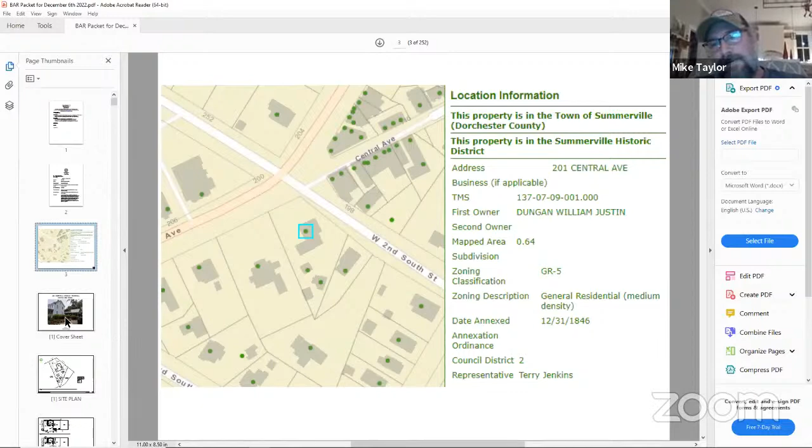Okay, yes, representing the Dungans for an addition to the right side of the house. There's an existing carport there, and they're wanting to turn this into living space. The floor plan will include a sitting area, a little mudroom that'll come off the front door, and a bedroom with a bath and a closet area.

The outside of the house is vinyl siding, and it's got a brick foundation around most of it with brick piers. So we've tried to incorporate the brick around the addition, and keeping with the house, we're trying to match the windows with the 2/2 windows. There is a door on the front that would be a fiberglass door that they want to paint. I think they're just going white with it.

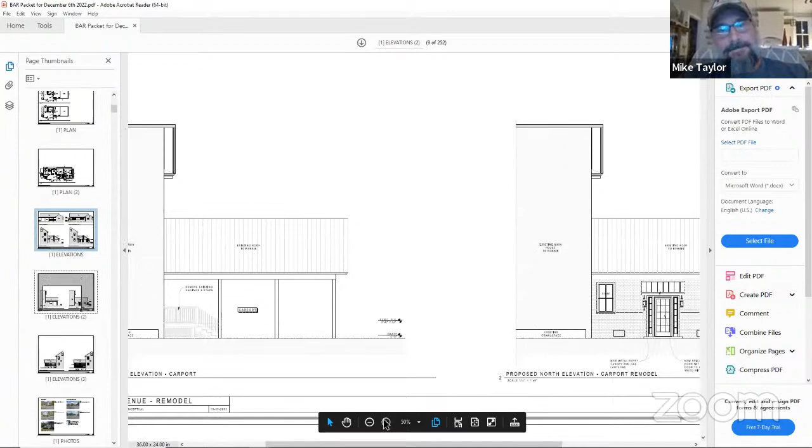Over on the left side of the house, they're also looking to add an open deck with an additional door on that side to access the deck. But the carport will remain with the roof, the gable end will remain, the eaves will be as they are. So really, we're infilling with the brick, the windows, and the doors.

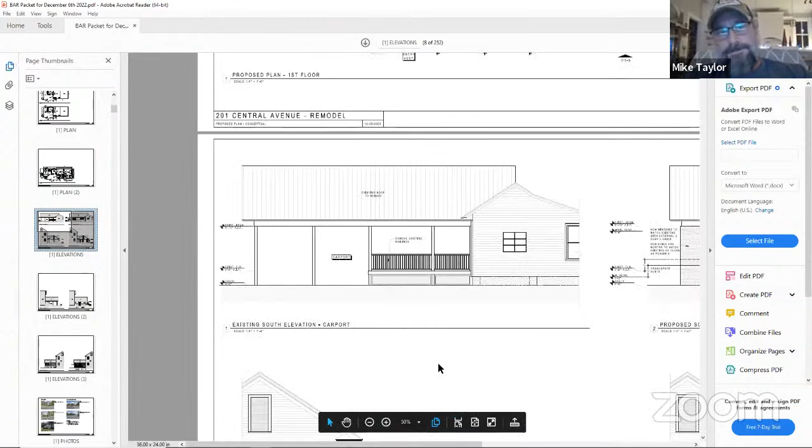Can I ask a question? I'm curious what happened about the tree. Does it need to be removed or not?

No, with this we would just enforce our tree protection requirements, which is a foot for every caliper inch of the tree. But no, it's not getting removed. Okay.

Any comments? Had this come before? Did we review this before? It was deferred because there was no one present at the meeting.

Becca, could you show me the plan, please? Which sheet? I wanted to see the previous and proposed plan, so they're laid out next to each other, existing on the left, proposed on the right.

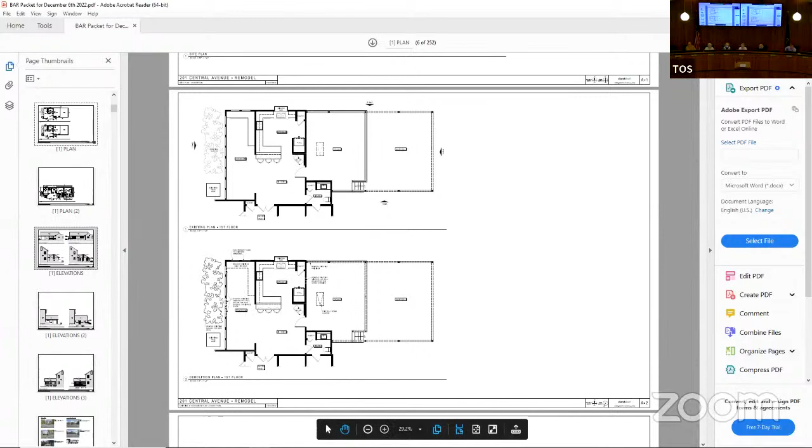Can you show me the plan, please? The floor plan? Yes. So this is the first floor with the demo plan, and this is the carport. I'll zoom in so you can see a little better. So there's existing, and then what is the proposed plan?

So are these all rental units? I believe, and Mike correct me if I'm wrong, the 3 cottages in the back are, and then the main house, which is the structure proposing renovations and the addition, well not technically an addition, is the main house where the primary homeowner lives. Yeah, so that's correct. The main house, where the work we're proposing to be done, that is their primary residence, right?

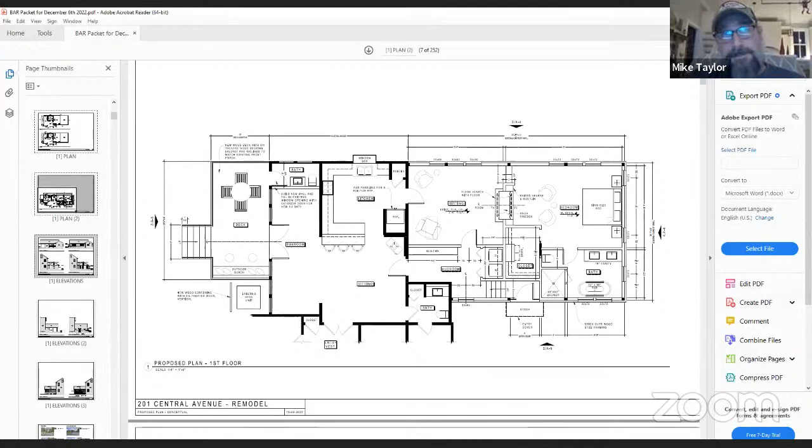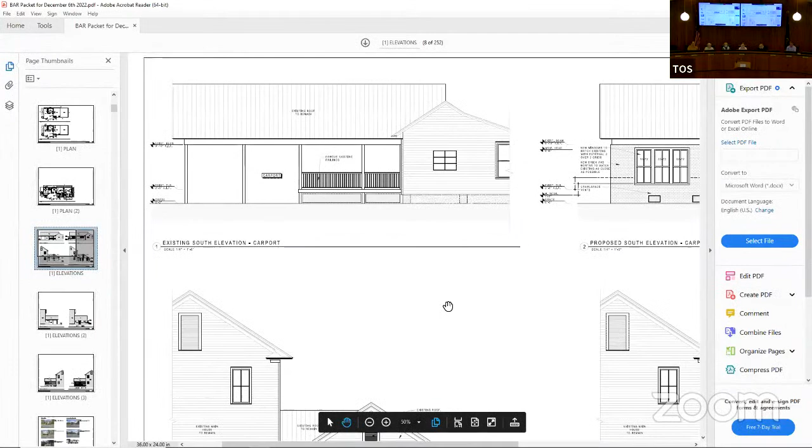And I think I saw someplace that the windows had a grid pattern. Are the windows currently in the house divided lights or simulated divided lights? Yeah, you've got on the back of the house, which I think was a sunroom that may have been added years ago, just a 1/1 type window. The main house is the 2/2 wood windows, which appear to be original.

It's a single pane of glass with the divided light. So on the carport side, to keep with the house, we were going to do the 2/2 with the external grid, which would match the house very closely. So when you say external grid, you're talking about a simulated divided light? Yes. Okay.

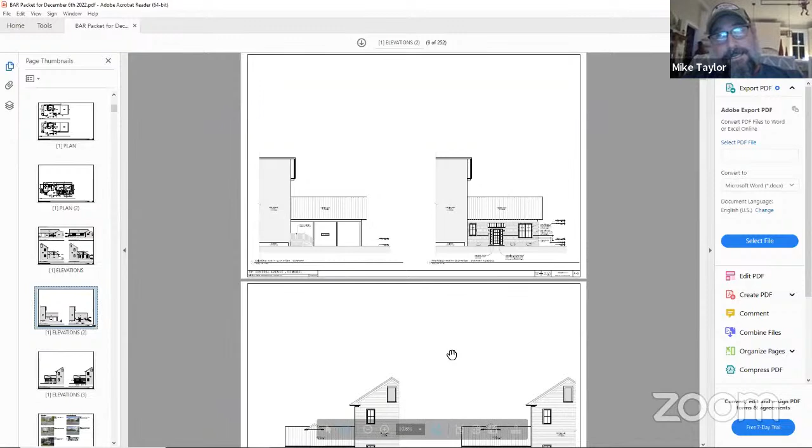And then you can see what they've chosen for the grid pattern on the door, on the right-hand side, on the carport side. Also external grids, and they've got some side lights on there as well with a transom. So that front door unit would be all together with the grids on the outside.

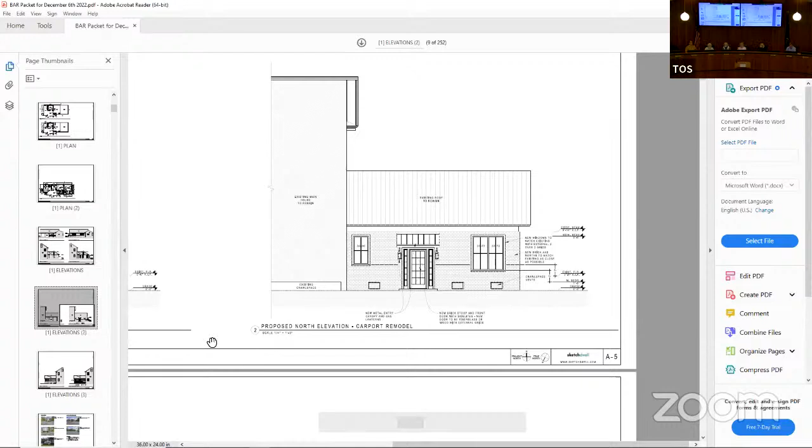I'm finding the drawings hard to read, and combining that, Mike, with the comments that you made, is this all going to be brick infill, or is it having siding with a brick base? I'm not sure and I can't tell from the drawings what you're doing.

Yeah, the outside of the entire carport enclosure area will be all brick. We've got a brick that's going to match that foundation very, very closely. And then the mortar, of course, we would try to match that as close as we could as well.

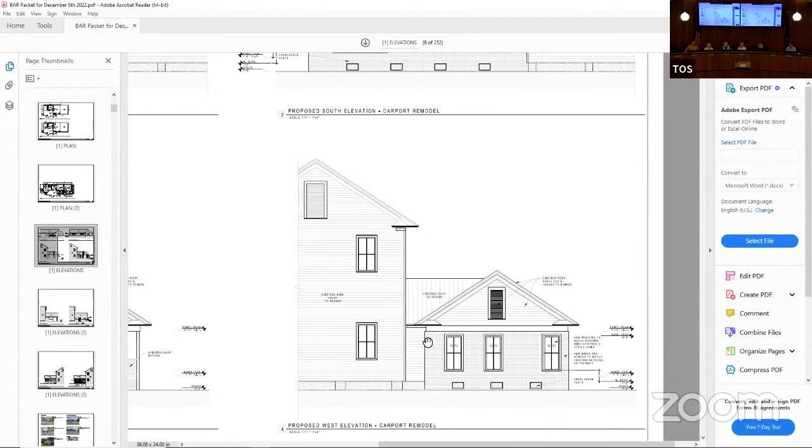So really, and gable up, is that why there's that little thing at the top where the brick goes up and then there's an inset? Not exactly sure what you're referring to, but there's an existing band board at the very top, Louvers. And we're going to brick up to that band board, which is the header basically around the carport. Right. So basically like a big frieze board up there that's existing, that is wrapping the existing headers.

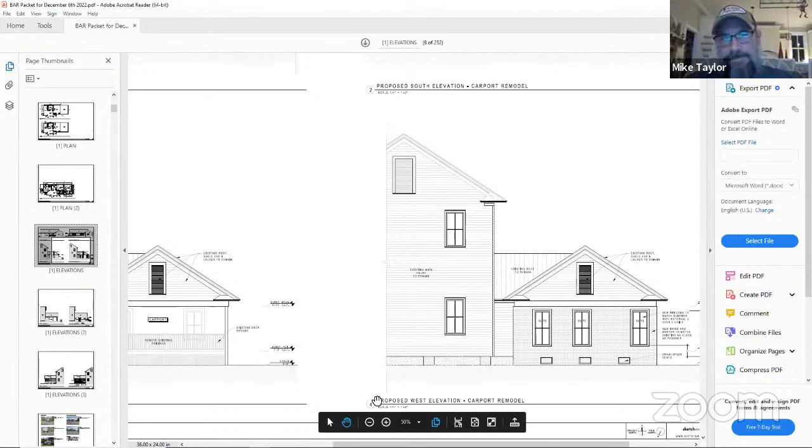The gable end that you see there, that's all existing with the siding and the metal roof, all existing. You can see at the front stoop we are adding a little covered area. We would match the standing seam roof with metal to match as close as we can, which is basically a silver, a Galvalume.

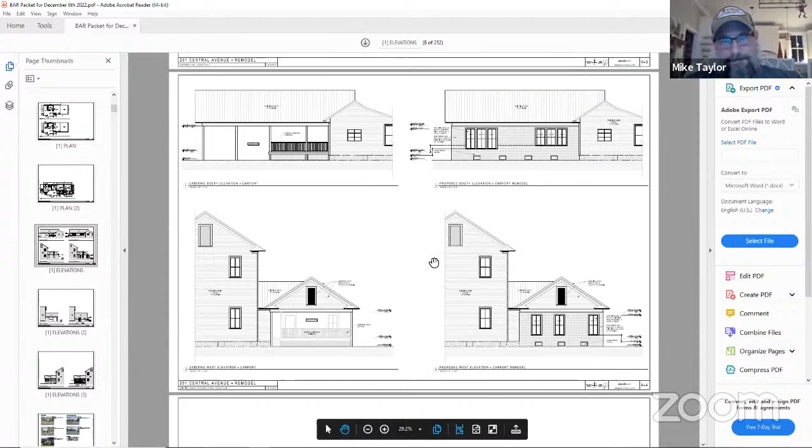Wouldn't it be appropriate architecturally for that band board to stand out over the brick rather than being recessed? It looks odd recessed. My thoughts on just hearing that it's all brick is that it's, to me, an odd detail that the brick goes up and then stops and that you recess it for that band board. And that equally, there aren't any of the details that might have been appropriate for like window trim. And I am also not 100% sure if this is the right choice, given the kind of colonial house that you've got, to add like to enclose this in this wrapped brick that is just clearly wrapped.

Does anyone else have any thoughts or comments on that, on the board? Rachel, I do. I thought that... what is the material underneath the vinyl on the main house? Or I guess this is the main house. What's under the vinyl?

Don't you have to use clapboard? They're enclosing something and creating a deck. I don't think we have anything in our guidelines that could force them to use a specific material on the existing house. It's beautiful, I love it, but I think it detracts from the main house. It would be hard for me to know which door to go in, which is the main door. One has gas lanterns on the outside and one doesn't. I just don't think it's a good match.

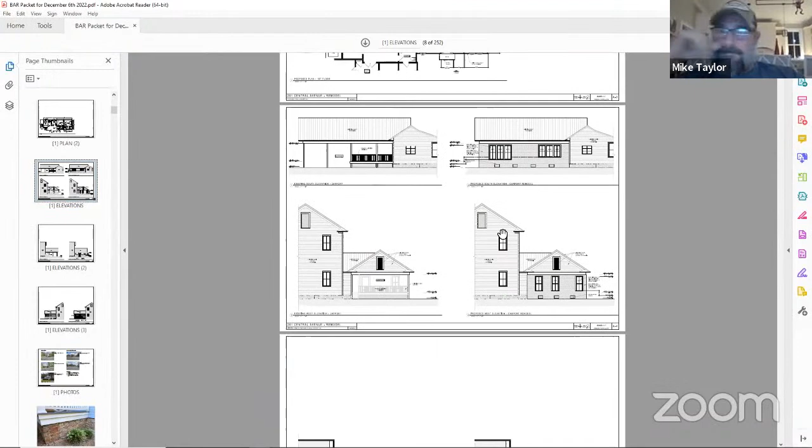When you say the windows are random, not really. The windows are laid out so that they work with the interior of the house. I thought we did a pretty good job of putting them in locations and staggering them so they weren't up and down and up and down.

You've got one bay of windows at a certain height because the bedroom area will drop down so we can get our egress windows in the bedroom. So you do have a different height window between the bedroom and the sitting areas - that's the difference in window heights.

What I'm referring to is the front, not the rear elevation - that doesn't matter to me very much. But on the front elevation that the public's going to see, you've got a double window on one side, and there's no other double windows on the front. The other one is a single window, not proportioned in the middle - it's kind of tucked over there on the side.

The front entrance door doesn't seem to be in keeping with the historic nature of the two-story house. This is becoming an addition to a historic house in our town, and it needs to look appropriate to the building it's tying into. Right now it just feels stuck over there - exactly what it is, a carport being filled in as inexpensively as possible.

Certainly we're not detailing that - the header is odd and unusual for it to project out past. There are just a lot of oddities here that I don't think enhance the architecture of the town in the historic district. I'd follow up exactly on what Tim's saying - on the end elevation you have one window which is in the middle but not centered under the opening above. It's so close to being centered but not quite, that it just feels haphazard.

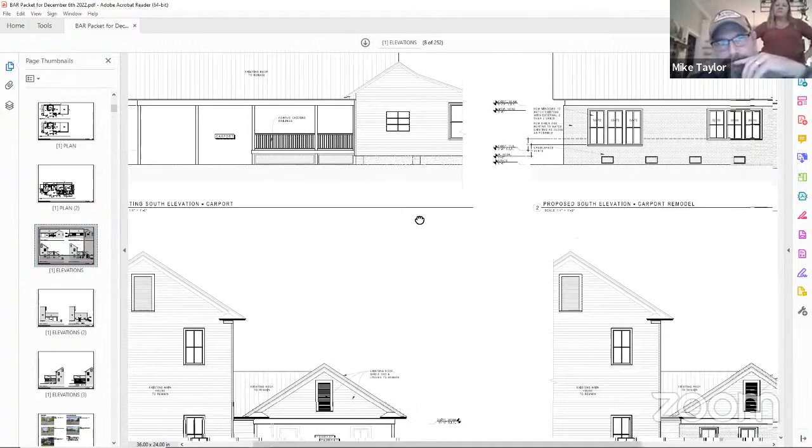It's not balanced. You're referring to, once again, the front elevation - the double window on the right and the single window on the left, right? They're completely not in keeping with the existing house.

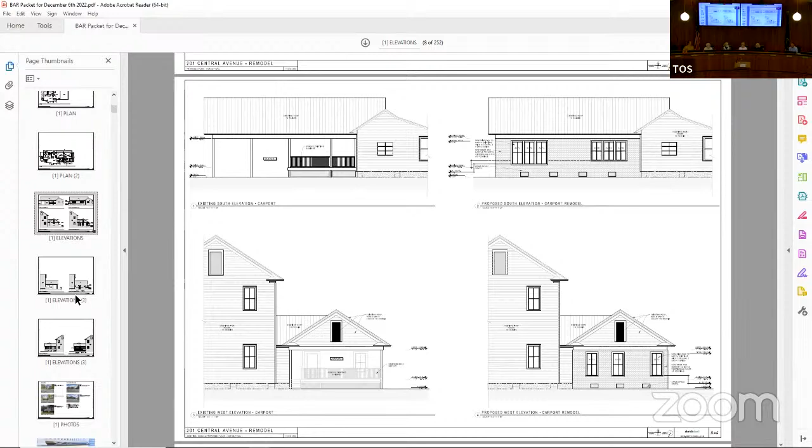Look at the existing house and the symmetry - how the windows are all proportionally placed equally, the same up and down. Then look at the addition you're proposing and how they're just randomly placed, in conjunction with the interior, not with the exterior aesthetics. At least the windows that face the street and can be seen from the street need to be proportional to the house.

All right, well that'll probably mean doing something with the floor plan as well to make that happen. And as far as the outside, obviously brick is not what you're liking, so I think there's only one other option, and that's board and batten. We drew it out and, well, we're going to do whatever y'all want us to do ultimately. So I think what you're saying is you want the outside to be board and batten, and then straighten out the windows as best we can.

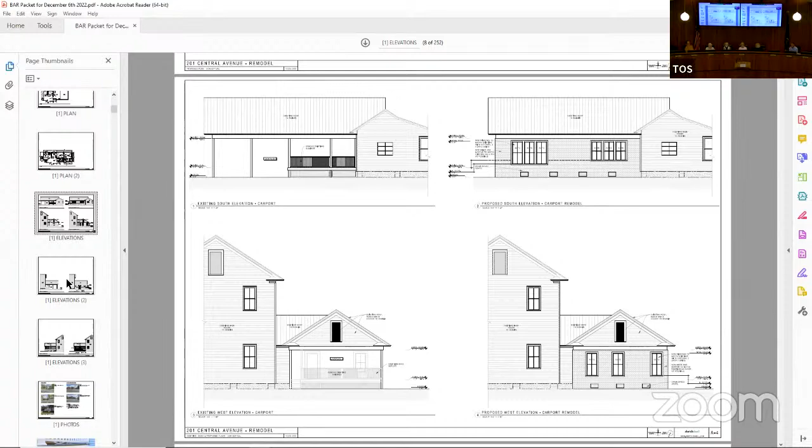It's part of what we're not getting across - the windows don't balance. There's a wide one, the door is not in the middle, there's a narrow one on the other side. Is there a way you can balance those to make them similar instead of having them just plopped up? I think one of the issues in making this look right is dealing with the fact that the addition is on grade.

It's on grade, right? And you cannot make that front match up with the front door - it's never going to look right because it's at grade and it shouldn't be at grade. It should be elevated, just like the house is elevated. And then you've got these windows where one side's shorter, one side's longer. So there's a lot of challenges there, Mike.

This might take a good architect to figure out a good solution to tie this all together somehow. Well, sure. So it sounds like in order to make the windows work, we're going to need to try to manipulate the floor plan. I don't know exactly how we'll do that, but certainly we can look at trying to do something different with the windows.

And then with the front door, I mean, you're talking about the front door being on grade. But Mike, in the front this is all one house, right? So the front door is on the porch. This isn't the front door, right? Correct. And so maybe the door needs to be on the side of the house or on the back of the house instead of the front where the public sees it, because there's already a front door.

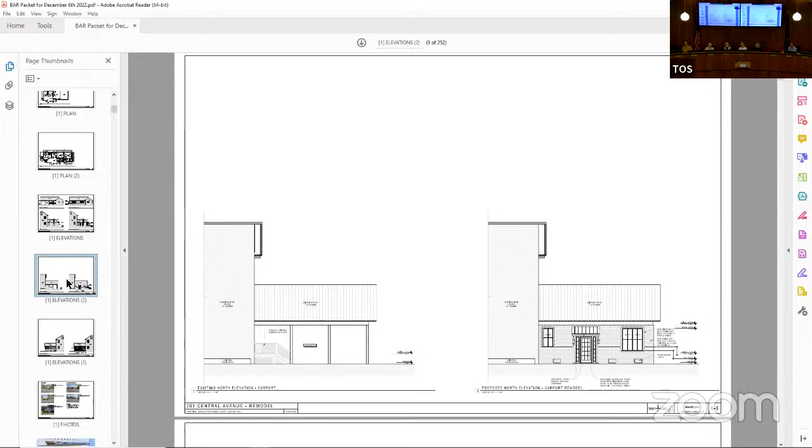I'm not sure what's going on in the house. It seems like it's another apartment, but I don't know. That's not our purview though, just the outside.

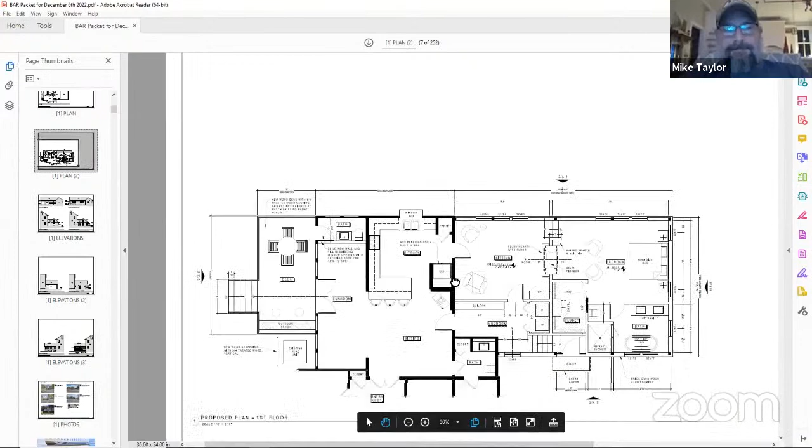No, it's definitely a master bedroom suite, bathroom, closet. And there's a sitting room that'll be off the kitchen, with a gas fireplace off of that sitting room. Is that extension the only kitchen in the house, or is there another kitchen in the main house? There's one kitchen - that's the main kitchen right there. So the sitting room will be right off of that.

All right, what's the height of the posts holding that section up? They're around 10 feet.

So Mike, there's a potential to go in there and put an elevated floor on the inside to get the appearance of that not being on grade, and then building a stoop outside for the porch to step up on. There are lots of good examples around town where that's happened, where somebody's got a front door and a side door, but it's all stepped up appropriately.

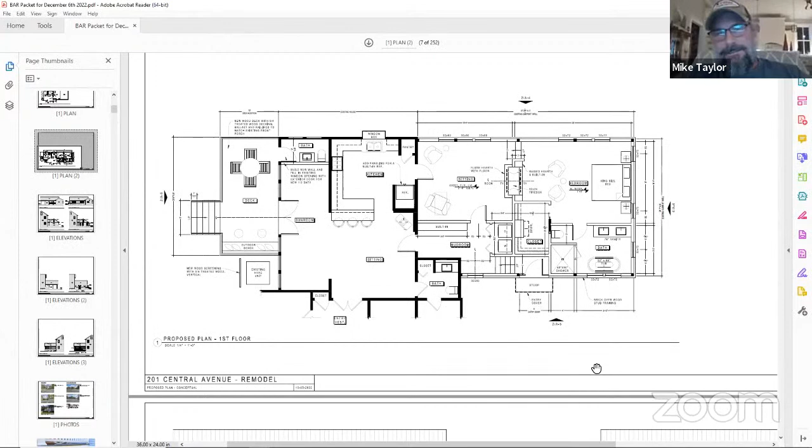Sure, if we raise that floor, we could raise the outside and then maybe run some stairs off to the right-hand side, not straight off the front, possibly.

But please consider whether that door is an appropriate element on the front. I don't think we can necessarily tell you categorically one way or the other what you need, because you'll need to try solutions that will make the infill feel more appropriate to this house. I don't know what the right answer is. All we know is that the door currently, as it is, is not appropriate on the street facing facade.

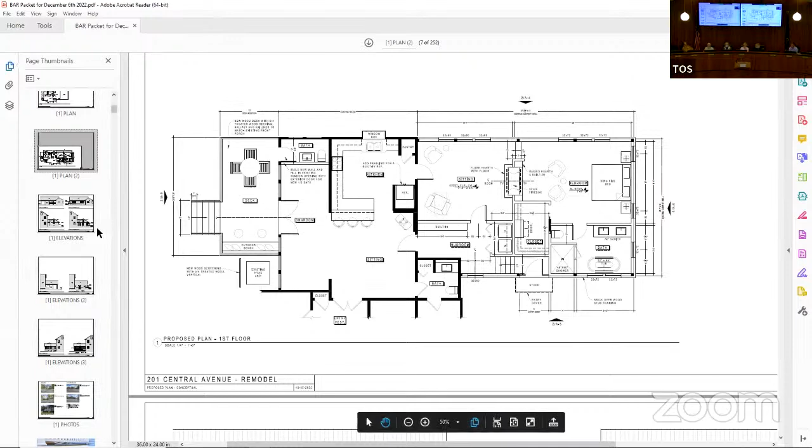And Mike, when you come back, if you could have whoever your drafts person is actually draft out the elevation so we can see the siding and the trim around the windows and everything, it'll help us really vision what you're trying to do there, and also help you build it correctly as well.

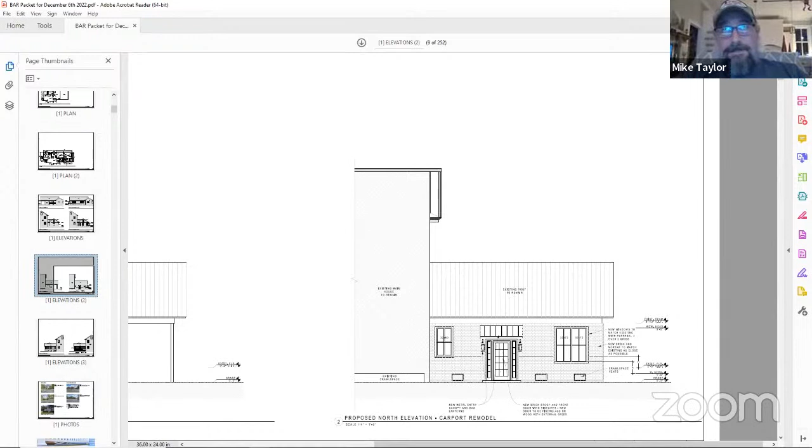Okay, so I guess one last takeaway. Certainly when I go into these meetings, I hope to walk out and start building, and we're going to be another 30 days from now. So I don't want to come back again and repeat. So I understand what we're talking about on the front door - we'll see if we can't raise that up, make that look right, or place it somewhere else. I don't know if putting it somewhere else is really an option, but if we keep it on the front, then we'll try to put it on a stoop with some stairs or something, if that's possible.

And then maybe we can change the floor plan around a little bit to get those windows lined up better to match the house. And it sounds like you guys would like to see a board and batten on the outside of that addition. I think what we're really saying is that brick won't work, and we're open to looking at alternatives of which board and batten could be an option, but we really need to see it to know if it will work.

Well, I don't know that there's any other option. We can't do lap siding right against lap siding that's vinyl, so I don't think lap siding is an option at all. If brick's not an option, then I think our only option is board and batten - unless you can get a lap siding in wood that has the same profile as the vinyl siding that's on there. Like I said, I think that vinyl is a small lap.

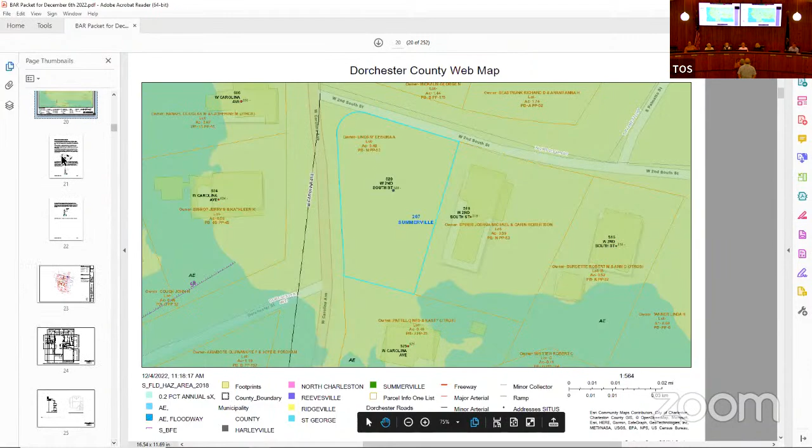Good evening, I'm Debbie Lindsay. This is Mr. Gene Brislin, our structural engineer. We appeared before you all in April of this year and received final approval, but we've made a few changes we wanted you to see and consider.

The changes that we've made are, we took the transoms off the front of the house, and we also removed a small window on the left elevation, right there where the garage doors are. There were three windows.

Mike, get on mute. I'll do it.

One was in the master closet, so we removed that one small window. And then there's also in your packet a discussion of the brick skirt we would like you to consider.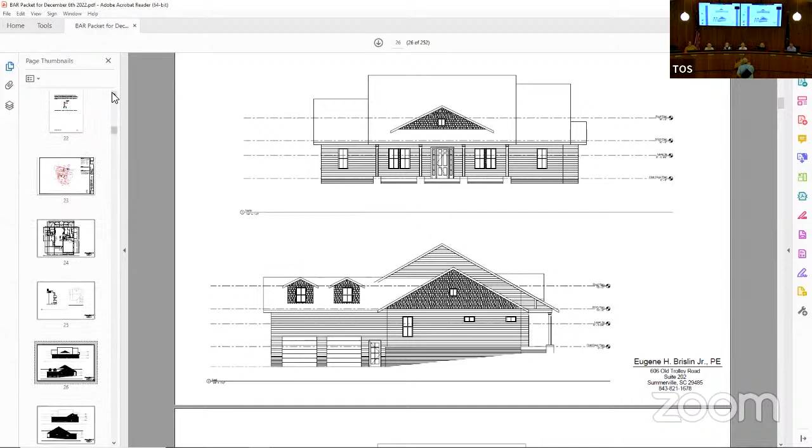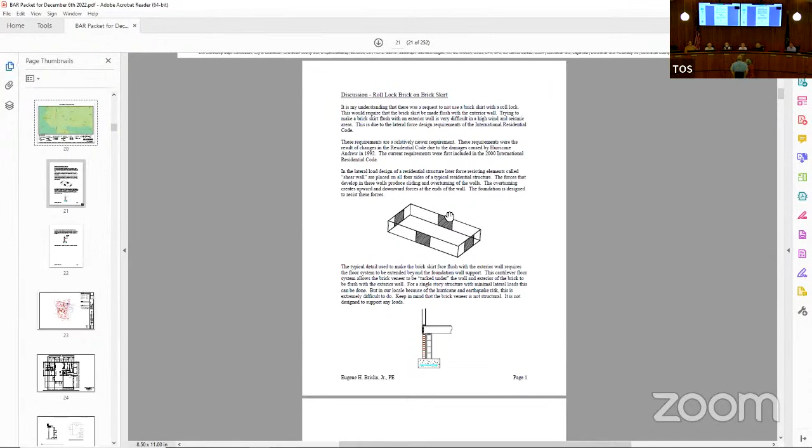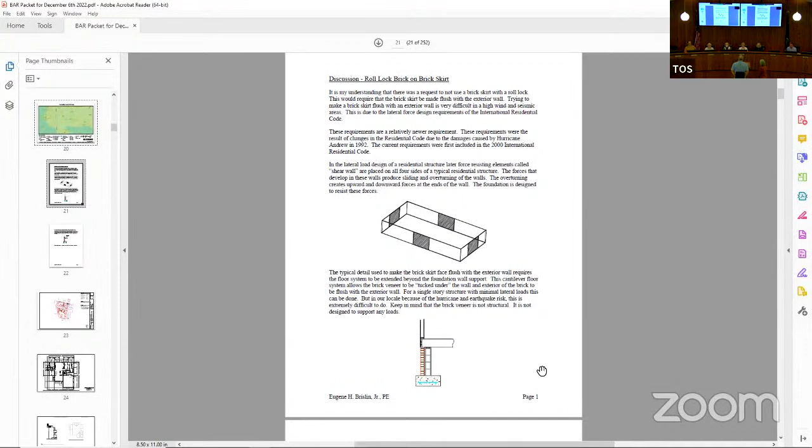Gene, if you want to go over that. John Dumas was the original architect and he did the drawings that you approved. His drawings are still there, all the trim and all the basics that he had on there we're still going to follow. I took those drawings and did a 3D model to give some massing idea, but mine didn't include all those details because John had done them. It gives you an idea of what the house is going to look like.

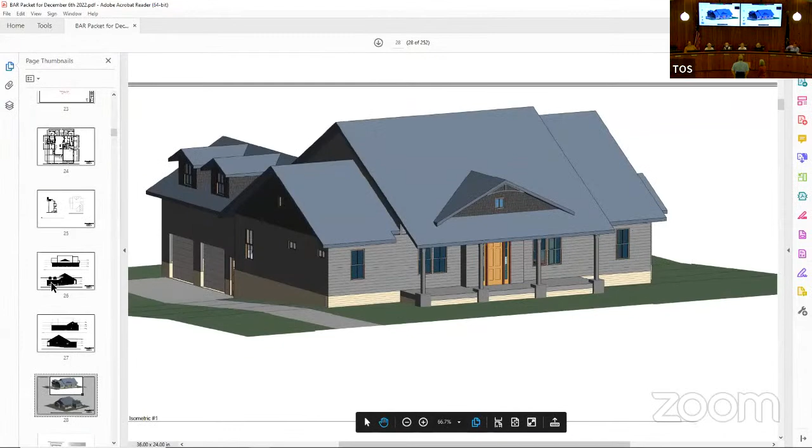As Doug said, the change we did was John had a very tall front door, about 9 feet, to match the transom windows. So we decided to keep the windows the same height and lighting as the transom, we just eliminated the transom itself. Now, we do keep them on the back elevation. They seemed to work well with the door because it's a normal size door, 7 foot I think, and she's got a 10 foot ceiling, so we checked it.

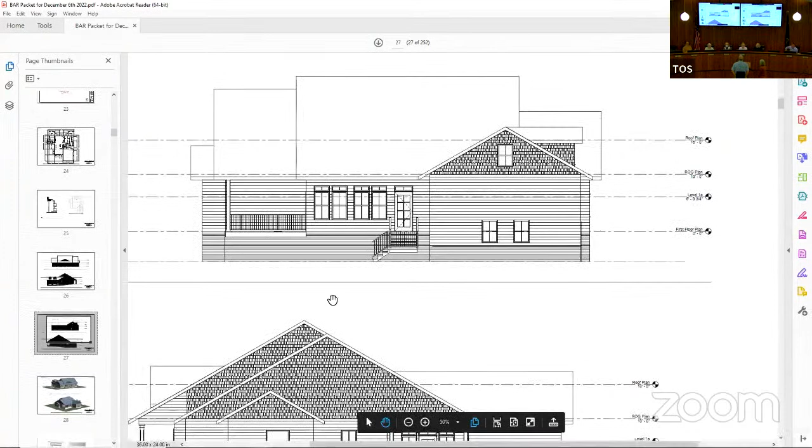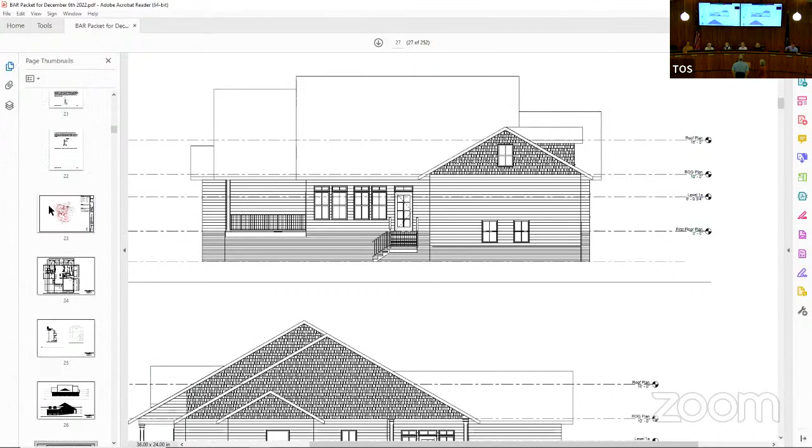I understand John had the original drawings, which I didn't see. I saw the revised drawings where he had tucked the brick underneath. The problem with that, from a structural perspective, is I've got to have shear walls on this thing, and I can't cantilever the floor system over and pick up the shear walls. There's nowhere on the perimeter I can do that and make it work. You can do it on porches, like the picture from the first project had a tucked-in brick skirt on a porch with shear walls and everything, but on the main house it's difficult.

You're talking about having the brick proud of the siding? Correct, which is probably the way we'd prefer it anyway. Oh okay, that's great. Don't we have a guideline that says it comes down to a course and then brick? We discussed that in a meeting, but it wasn't historically accurate. Not what I preferred.

Structurally though, I have a problem - the brick is not structural, it's veneer, so we don't use it for strength. CMU is a load carrying component. I've got a cantilever that's over 7 inches, and then the floor system has to take all of that overturning portion, that shear wall - it's very difficult to make that happen, if I can make it happen at all. Plus I have 2 connectors on either end of the wall to hold down, and there's no way I can get it bolted sideways over to get to the CMU.

So Rachel, I've got a question for you. I'm a contractor, but I'm not a home contractor, so we don't do this, but I know we've had lots of other applicants come before us who've requested this detail and done it. I know you kind of do some residential - how do you guys accomplish this?

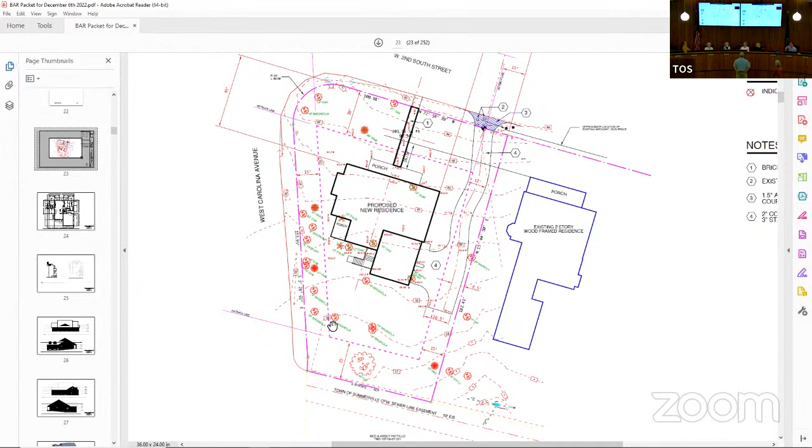But Gene, I want to clarify, that elevation was not actually what you want to do, was it? You've changed the windows, but won't the brick be out from the face of the house above? So the brick then insets? Yes, yes, it is. So the elevation as drawn is not what we're... it may not be, I will have to go back and look at it. No, that's correct, that is not.

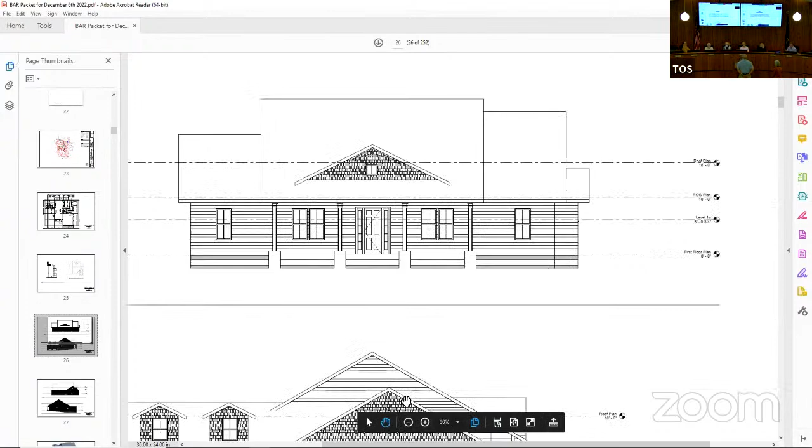There would be a bump out on the left, and the when you're saying you like that elevation, that's not what he wants. So on the left side and on the right side, there would be a little bump out, right, at the foundation. Oh, I see what you're saying. And then on the side where it gets even taller, you'll have a bigger- 3 inch, 3 and 5/8, or maybe 4 inch bump out on the left and right. That's correct. Yeah, it's just on one side. It's right around there.

An option we've used some other places is thin brick. They're actually brick adhered to the foundation wall and they get mortared in, so they have the appearance of real brick. They're only about a half inch thick or something like that. It's a feasible solution with a smaller trim band at the top, so that's an option we could do to keep the brick and satisfy the structural requirement. You can get those thin brick in almost any brick color or shape you've picked out. Are they not more subject to cracking? No, not really, because they're real brick material, so it's not a faux brick. It's just the brick face has been cut off and then you adhere it to the wall.

Quality. I haven't had an experience where I've had failure with that. We've used them, Tim, and they're really effective. I understand it feels like it should be flimsier, but honestly, when it's up, it's virtually impossible to tell that it's not a full-size brick. Especially if you're putting it on CMU, it will have that stability of the CMU behind it. It's a good solution.

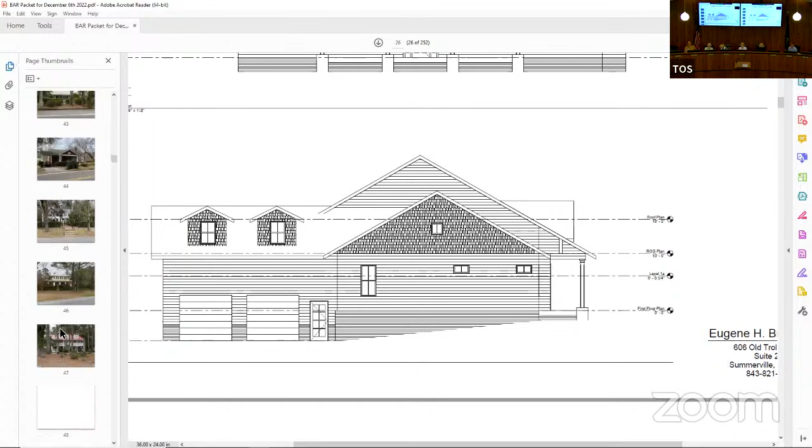All right, now we have another old business piece, 105 Hansberry Lane. I do have one letter to read for this one, so I'll just read it real quick, short. This is from Miss Mary Buchanan: I'm not in favor of vinyl on Hansberry Lane, we're in the historic district and guidelines should be followed and not set a precedent. Once the BAR gives approval, the plan should be followed. I have no problem with changing the front door as long as no vinyl is used. Thank you, Mary Buchanan.

So Heath, if you just want to explain what, yeah, we're gonna start with the doors. Okay, so originally with the door, basically I've taken out the side lighting, I guess, side transoms, side lights. So I apologize on that, but me and my wife, we've taken a look at it. It came time to order the door. And

we kind of have, the way our house is, we have a big vault that runs straight down the middle of the house, and we kind of actually want a little bit more privacy, so we really just don't care to have the side light there. It's the reason for us removing it. And yeah, so we left the transom up top. We still want to keep the same, like a wood stain finish on a fiberglass door. So everything about the door stays the same, we just removed the side lighting.

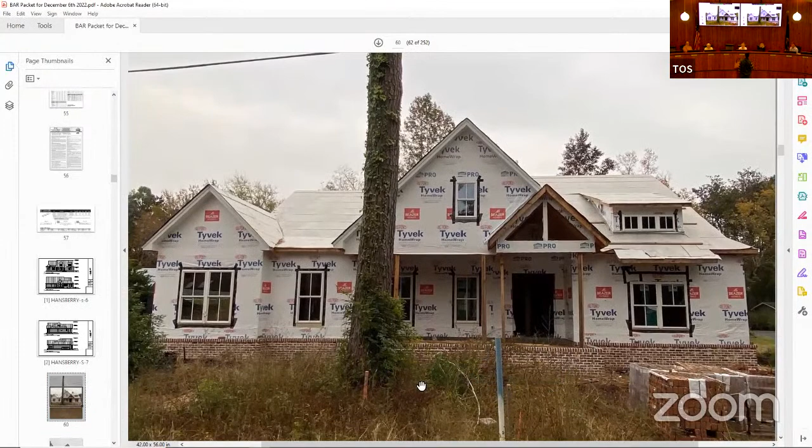Better picture here. And the siding on the house is Hardie plank, that's right? Correct, yes ma'am, and we approved the hardy plank. You did approve the hardy plank, that's correct. The issue I had is I didn't list vinyl for the soffits and aluminum for the fascia. I wasn't aware that I needed to be specific on listing the material for this area.

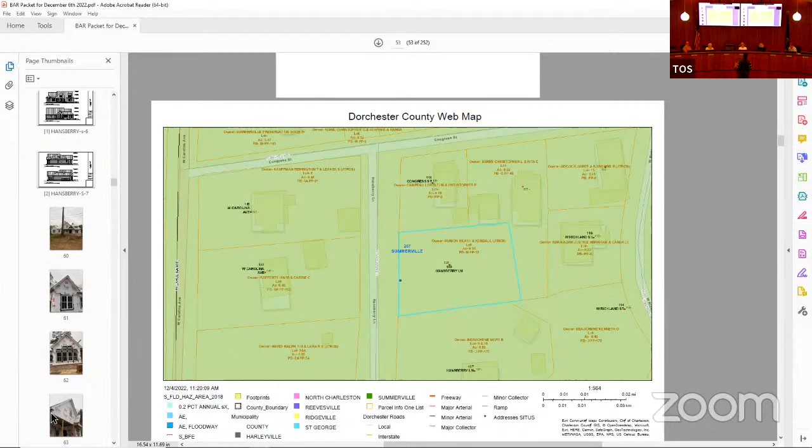And so my builder, the next door neighbor who is on the corner, I don't know if we have the property map, Mr. Campo, he has exactly what I'm doing. He has hardy plank siding and then aluminum fascia as well as vinyl soffits. If you drive throughout the historic district you could find it. A lot of my neighboring houses have it, except for Miss Buchanan who lives directly next door, hers is all wood, but there's aluminum fascia and vinyl soffits down in the historic district. So I wasn't trying to find a workaround, I just didn't see an issue with it until I was made aware.

And as you can see, we have started the work. And when Beck let me know, she did email me, we did stop.

There's certainly, as in the past, been a lot of vinyl. It's one of the things in the last 5 or 6 years we've tried to steer away from, significantly. I kind of feel like it's an important detail. And I'm willing to say okay, this is my personal opinion, on the door, but the soffits I feel like need to be hardy. I think it's this level of standard we've kind of adopted for the historic district.

Even though the neighboring properties don't follow those same guidelines, and I'm not trying to say I care what other people do on their property, that's their right between y'all and them. We can't undo the past. Just like the historic house with the blue vinyl siding we looked at earlier, we can't make them take it off, but we would never approve it going forward. So this is one of those cases where for new houses in the historic district, we just don't approve any kind of vinyl on them.

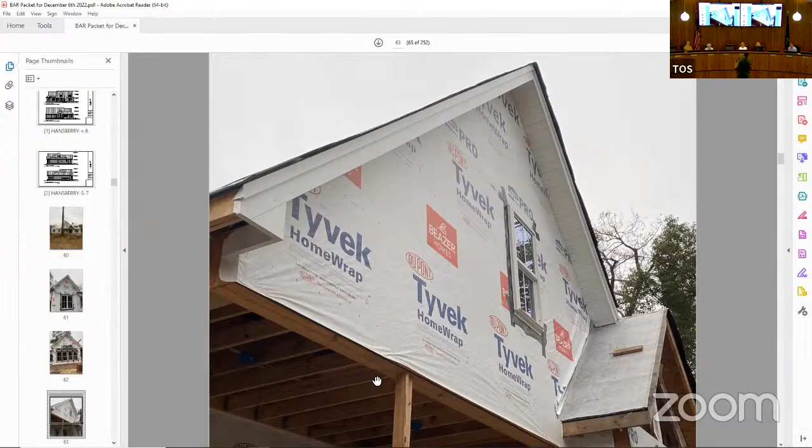Would you require him to take it off? So just so you're aware, if it does come down and we have to go the hardy plank route, I've been priced for it, it will cost an extra $4,400 to put hardy plank for the soffits and the fascia, including the paint.

Me and my builder just weren't aware of it, considering neighboring houses. There's actually a garage behind me on the corner, and the whole garage is completely vinyl.

I understand vinyl doesn't have the best reputation, and I don't want a vinyl house. That's why I'm going to put hardy plank around the house. As you can see, me and my wife are trying to put together a quality house. We've tried to take the right steps to do that.

We're not looking to take shortcuts either. We're putting a metal roof on the house, and for the brick, I had to go a little over budget to make sure I got a brick that I thought had a classic historic look. We're not looking to take shortcuts, but...

In this situation, yeah, I do apologize, I wasn't aware. Considering neighboring houses and other houses down in the historic district have exactly what I'm putting on my house. Specifically, the one right next door to me has exactly what I'll be doing.

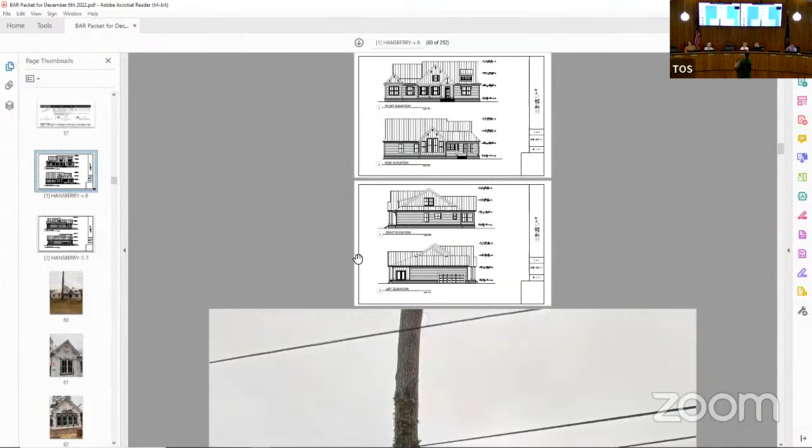Did she do the architectural building plans? Well, I don't think those were ever - she provided me information on what she thought was best. We basically came to agree. We were basically working together, she was like 'this is kind of what I think,' and she stepped in after I originally took it and designed it. These are the original elevations.

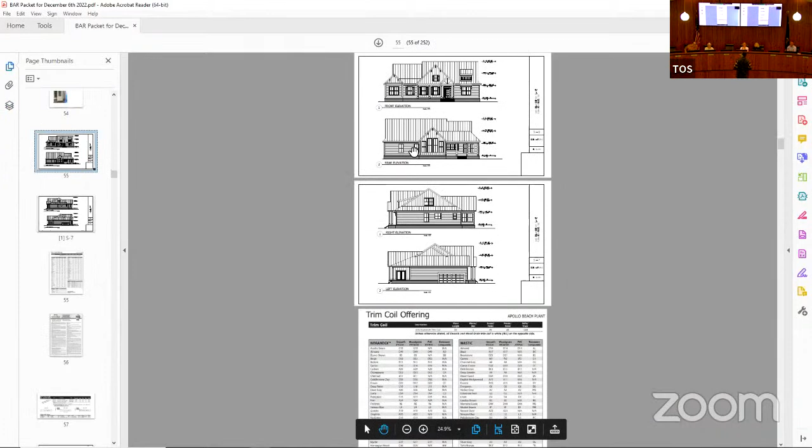Can you blow those up as best you can? Yeah.

So that detailing I see up there with the corbels and the brackets - how are you making those with vinyl? The portal will not be vinyl. You're talking about those brackets? Yes sir, those will not be vinyl. And then the frieze board, that's the board that runs up the rake of the gable - you're talking about the soffit of it? Is that going to be hardy?

So you have the fascia board, then the soffit, then the frieze board. You see the freeze board is the one right below it - it would be this board right here. So this is your fascia board, and this is what's called the frieze board sometimes. Is that going to be hardy? I think so - I don't... I understand, I apologize. No, that's okay, I understand, I can't give you a definite answer. Sure, I understand.

All right, David, looks like you get to decide.

We have a motion and a second. The motion was to approve, right? Approve as is. All right, I'm going to say yes. Yes. No. Yes.

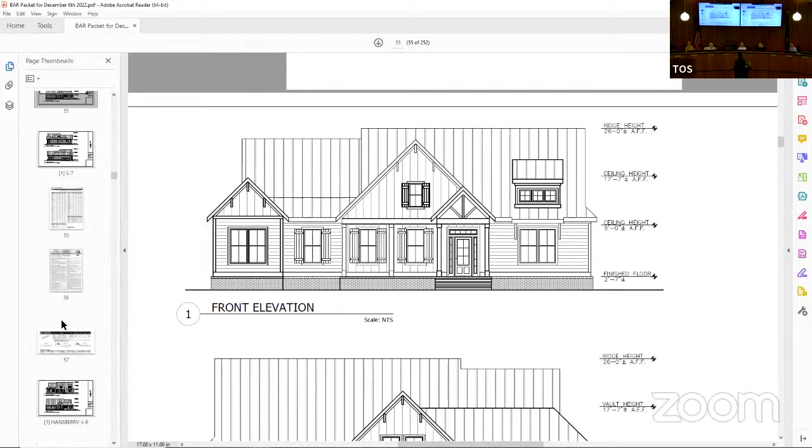Looking at your photographs, for us it's a privacy issue - I don't know if you've had a chance, some of you have walked through, but there's a huge vault that runs right through the middle of my house. Well, you've got a big glass door on there - yeah, that's correct. So the way you overcome the privacy issues with side glasses is you put sheer curtains up - you still get the light, but you don't have the visibility for peeping toms.

Yes sir, I mean it's just a preference - is there a rule that states going with one door over the other? There's no rule, it's just what's already been submitted and approved, yes sir.

The front door of a house is an important element, and it makes the front door and side lights enhance it. I've got side lights and an oval glass, and I've had to dash from there to my bedroom because you can see straight through my house. However, it looks great from both inside and outside.

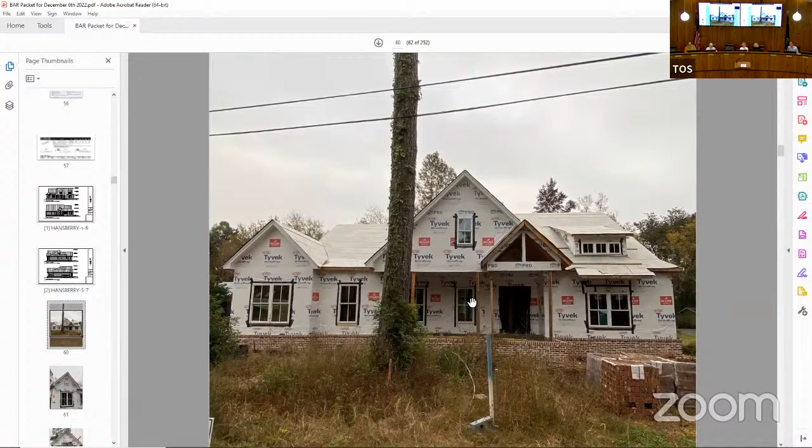All right, now we're actually in new business. Wow, 213 South Laurel. I'm scared now.

And Mr. Haskell, if you want me to show a specific image, just let me know.

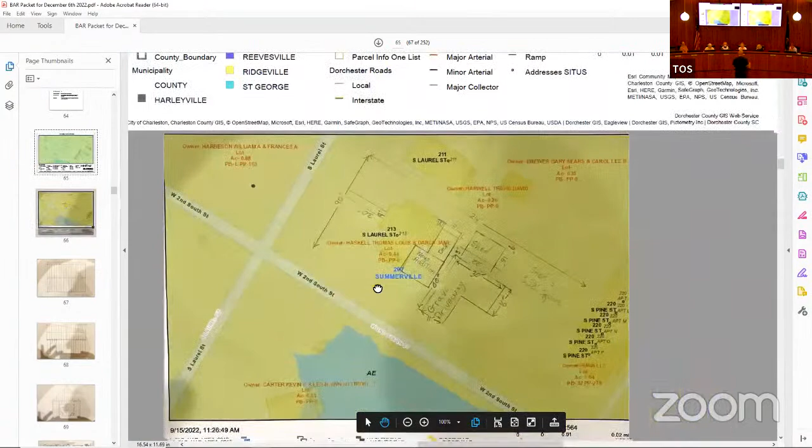Do you just want to explain the scope of work? Okay, I'm sorry. That's okay.

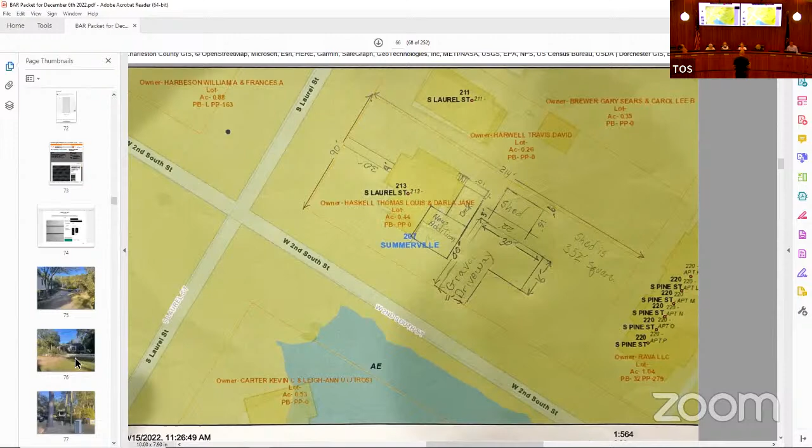What we want to do is put a shed in, back to the house behind the deck, along where you can see it's written on there. We have limited space in our home. One room is completely full of stuff, and underneath the house is full of stuff. We need to have some place to store these things. Right where you see the Honda and the old truck is the approximate location of where that shed is going to go. We're trying to build it so it matches aesthetically the same as the outside of the house.

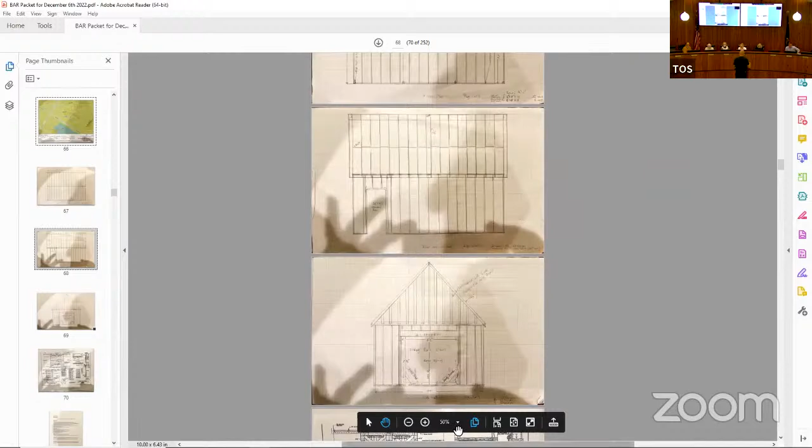We're going to use Hardie board siding, wood fascia, Hardie board. We don't intend on putting any windows in it right at this time. We are going to put a 36x8 door on the left side so we can walk in, and we want to put two doors on the end facing towards the house, barn door style, so we can get stuff in.

Are those barn doors on tracks or is that on hinges? They'll be on tracks, is the intention. Okay.

I have no doubt that you're going to do a good job with this because you've done a fantastic job with the house. But the drawings that you presented do not show the detail of the frieze board. There's a separate addition to this at the end that has all the explanations of how we plan on doing that, a specific drawing for this box right there.

The blank, I apologize, that kind of describes how it's going to be built, but not necessarily how it's going to be finished. Okay, like I said, next year it'll be Hardie board trim. The roof will be asphalt shingles to match. But the trim details are absent from the drawings, although I have no doubt you're going to do it right.

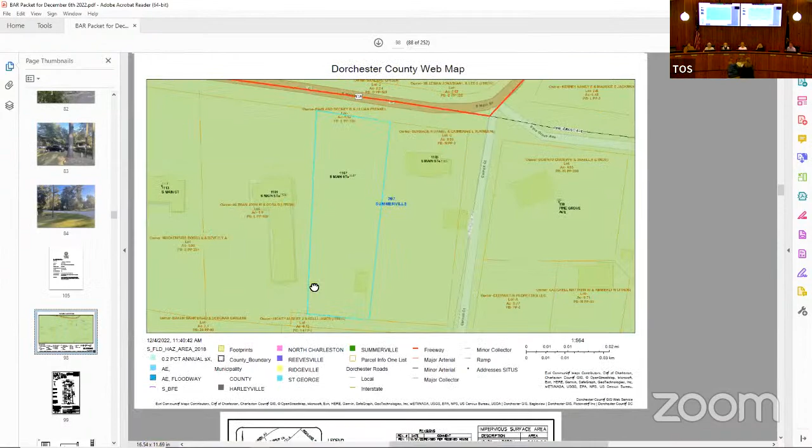Rodney, and this is Jillian. Our first time, so we're not sure.

Just tell me if you want me to jump to a specific view or page. Start out with, do we have a photo of the house? Of the new house you're building? We submitted one, I think, within the packet.

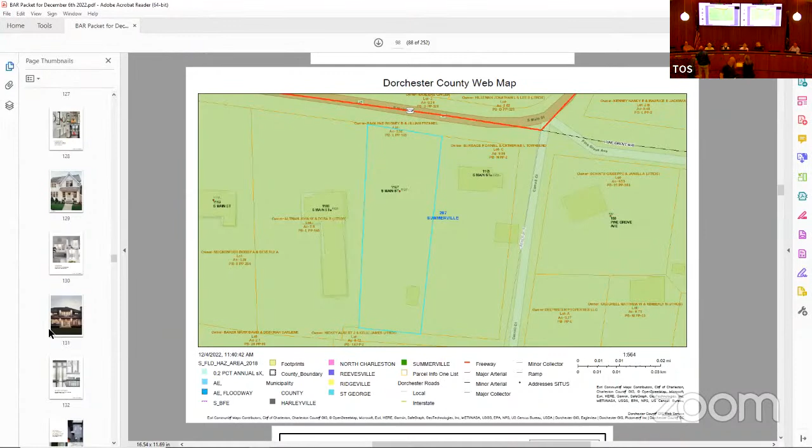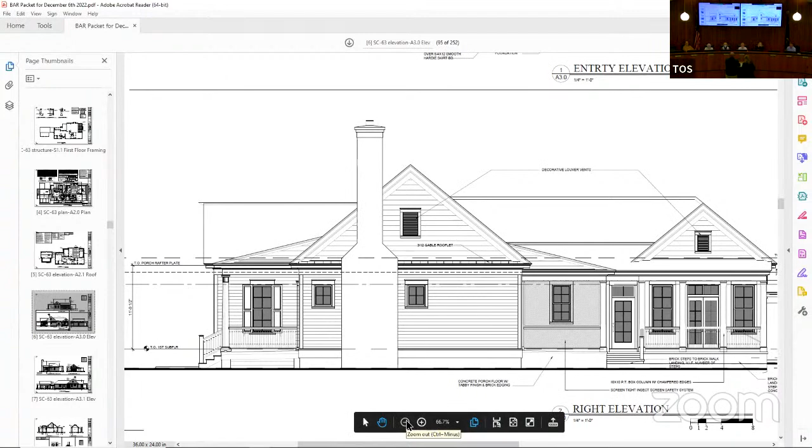Now, the only thing, I had the arborist come out after we submitted, and the detached garage, we're gonna have to move back. We have a lot of trees on the property. There's a 100-year-old hickory and a 100-year-old oak, so we want to obviously keep those. So what will happen is it'll still be a detached garage, but the breezeway will no longer be, and the garage will be moved back.

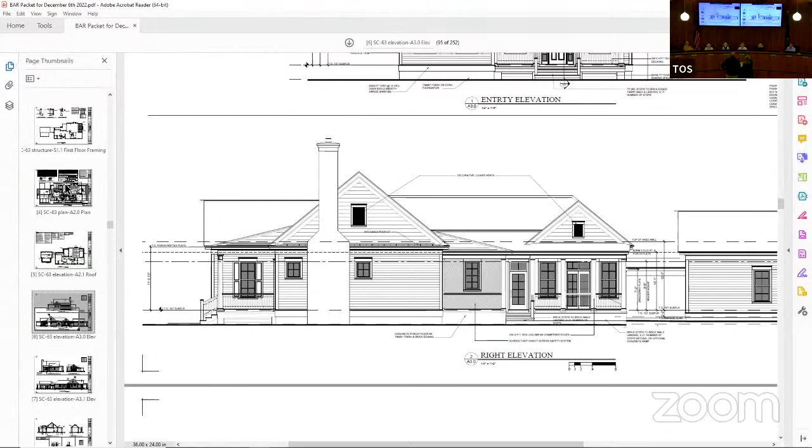It looks like it's moved away from the trees, like 75 feet back, going all the way back. Yeah, that's right, that's right.

Let's see, y'all have to go through some kind of a variance for the setback requirement there on the garage. No, we're within the setback. Detached accessory has different rules for setbacks. Okay, yeah, it's 10 feet.

Okay, good. Are we reviewing the garage today? The whole thing. Okay, so it's the same garage, just located back there. Gotcha, okay, thank you.

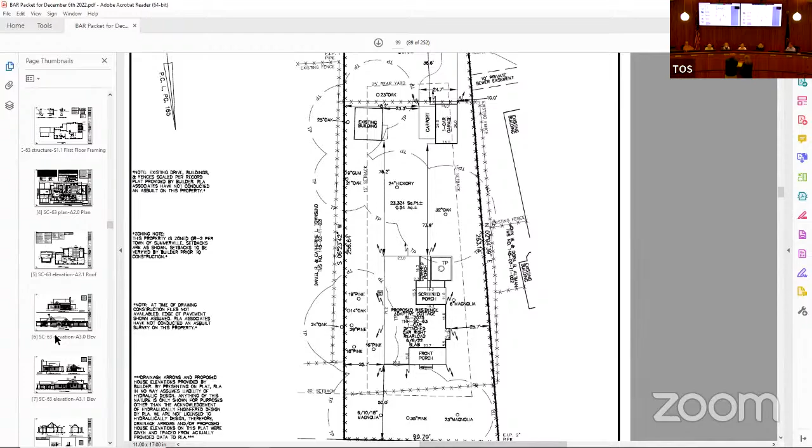They're wood clad windows with SDL grids and shadow bars. We won't have screens in front of the house. The front door is mahogany. The rear doors are also wood clad.

It's a great looking house. I wish you could see a photo of it. Yeah, I wish we did. I read the article about your home in Beaufort and saw the photos. It's a really beautiful home.

Thank you. And actually, on a whim, we decided to go down to Habersham and I said, we're gonna find this house. We had no idea where it was. So we went around and looked around Habersham for about an hour, and there was a lady walking her dog. We asked her, hey, have you heard about this adaptive cottage? And she said, oh, yeah, let me climb in and I'll take you right to it. So she climbed in the truck and took us to the house, and we boldly knocked on the door. The people living there gave us a tour of the house. Oh cool, so yeah, it was fantastic to see something that's already been built.

Well, it's also nice to see architectural drawings that are complete. As far as that, I'd especially like to compliment you on that, because it's so much easier for us to actually see all the architectural details, see the proportions, see what the foundations are, how it all works. It makes such a difference.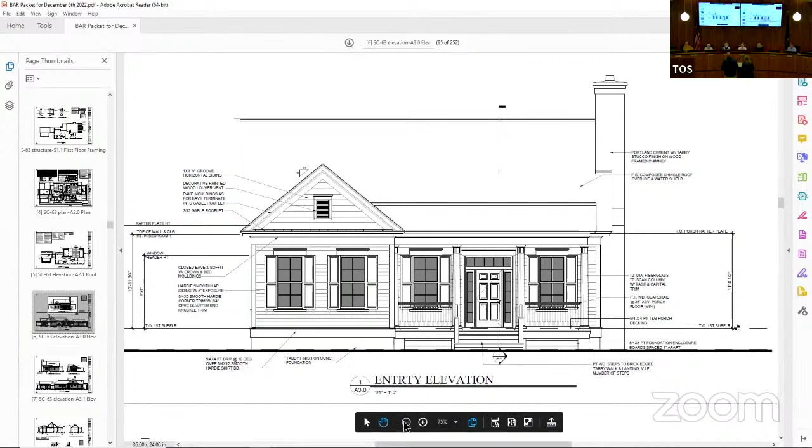It shows barn doors on the side, but since it's going to be so far back on the lot, I decided to close that in instead of just putting barn doors, for security. I don't know if that's something I need to address. Thank you for mentioning it. It's okay, suits me.

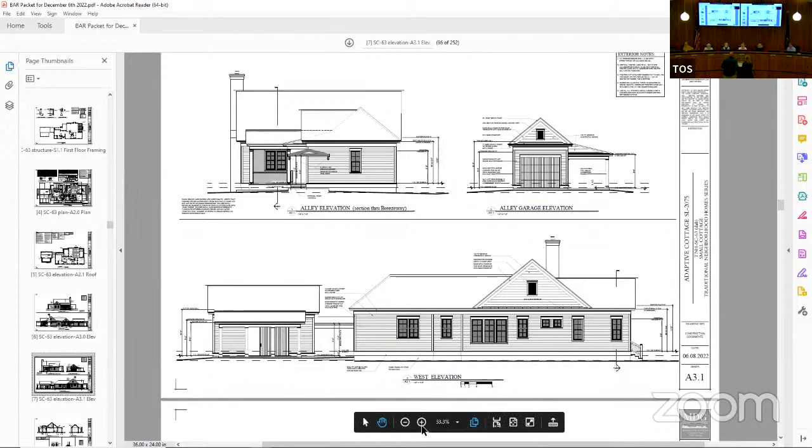One question back to the house: the distance from the ground to the first floor or porch is 24 inches. Is this going to be built on a crawl space? It'll be a raised slab, 24-inch raised slab, with tabby finish.

I'll make a motion we approve. See what happens when you come with decent plans. Awesome, that's the motion. Do I have a motion? I'll second it.

Jane: Yes, I approve. Beth: Yes, I approve. I loved all the attention to the details. Nancy Jean: Yes. And I: yes.

Good luck, guys, looking forward to seeing it. You have to give us a tour when you finish. Oh yeah, thank you so much. Okay, thank you, good luck. Thanks.

And the next one is 918 South Main.

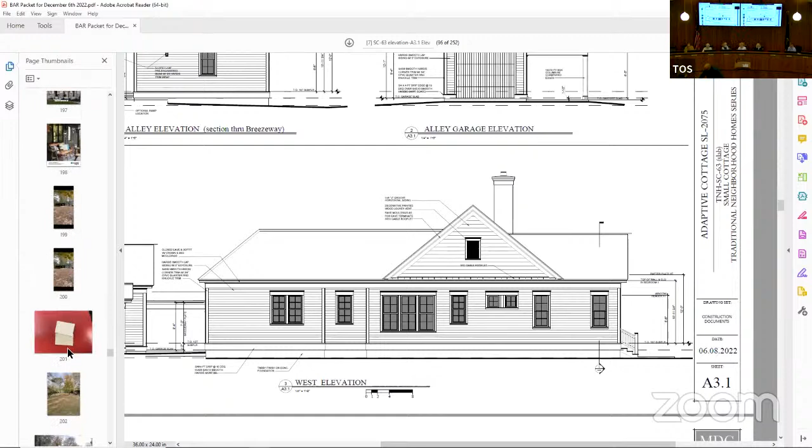I'm gonna ask you to raise the microphone a little. I'm a little old lady hard of hearing. There we go.

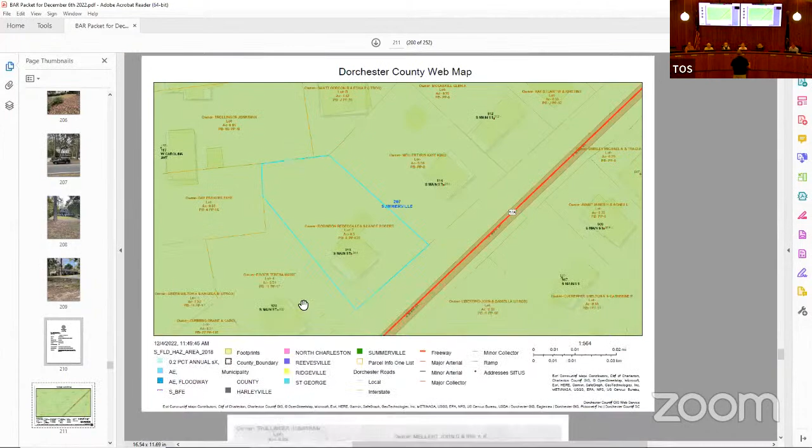So there's the main house, basically the screen porch is going directly on the back. There's already a small mud room that was attached to the house. So we're going to basically enlarge that and pull the back of the house out about 16 feet, keeping the same elevations of the soffit and the fascia.

It does have vinyl siding on the house. We're going to try to match that with an almond Dutch lap type siding.

There's a picture of the front of the house, and there's a picture of the rear existing. That one bump out on the left is the mud room that was added on; that's coming off and becoming new, if you will.

That only comes out about 10 feet and the new part will be 16 feet. Then to fill in that inset corner there will be a screened-in porch, with 6x6s on the corners, standard 2x2 pickets and handrails on the inside of the screen porch, with a vinyl screen door on the back.

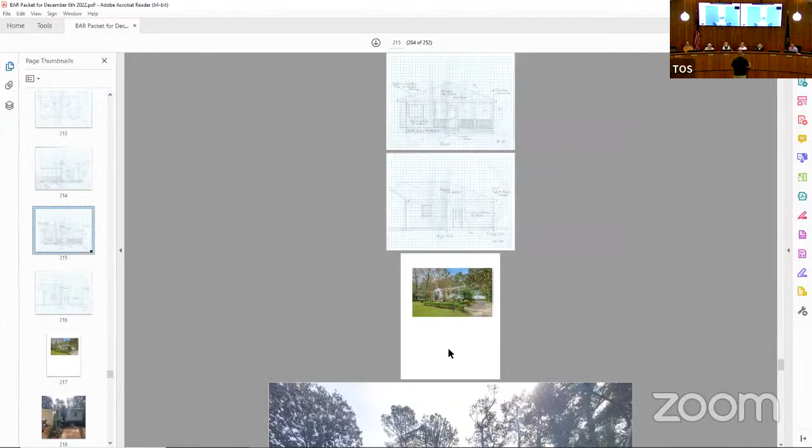And what were the new windows? One window that we're gonna propose to put on the back, and that would be either a double hung with, a vinyl double hung if possible, just because it's not seen, with the wide trim on the sides to match the rest of the house. And it says picture window there because that was sort of the first thought. That window would be approximately 48 inches wide, about the same in height.

How much siding are we adding? Are we adding it on three sides, or how many? Just basically that one part there, about 12 feet wide and about 16 feet, which currently is about 10 feet. So we're adding about 6 feet on, and to the one back picture there that showed - so not adding very much.

And to be honest with you, there's that whole right side where that tankless water heater is - all that is coming down, and we can more than likely use that so that it's the exact same siding.

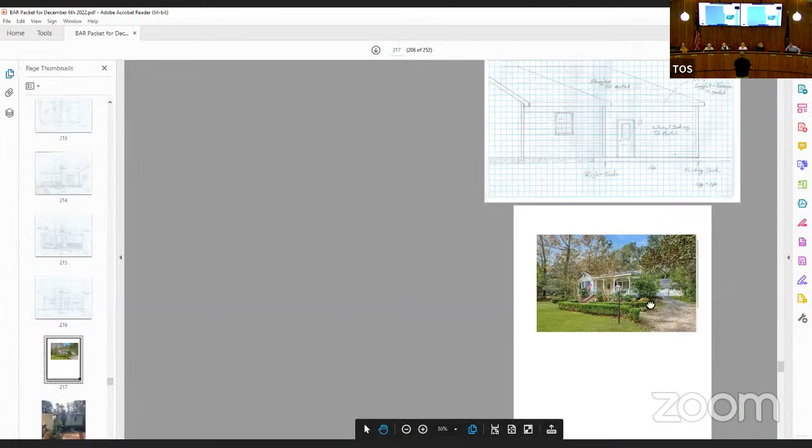Is this the house by 5 Points? Yeah, and there are like 2 or 3 cottages right there together. 920, yellow house, I believe—it's a cute house. So you walk back through, there's a doorway here and you walk back into where the porch area is.

I want to say we approved the garage many years ago. I think we approved the garage many years ago. That may have been a different project. The garage is vinyl siding as well.

For what we're going to have to remove, I can put back the original siding so that it matches completely on the exterior—for the vinyl, you mean? Yes. So almost like you never even knew it. Right.

But you're adding on, so you're going to have to have some new material on that inside wall, one side wall. Then you have the back and the other side wall, correct? So siding was being removed—right. Yeah, whatever you guys think is okay, it's the back of the house.

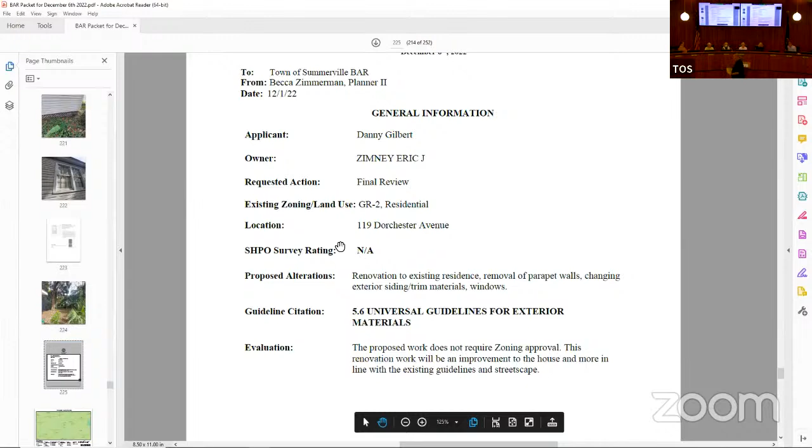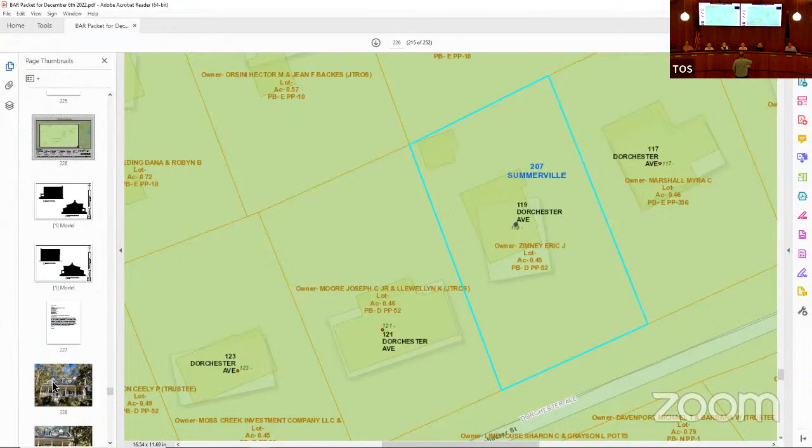And the final project is 119 Dorchester Avenue. My name is Danny Gilbert, I'm a general contractor. My client is Amy, in the back. We're a little different than everybody else because we're not asking for an add-on or to build something new—we're just trying to repair what we have. Amy lost her husband this past year, and she's found out that the whole stucco system on her house is failing.

It has parapets—you see on the roof there are parapet walls. All we're asking is to tear those parapets down, since they're rotten anyway, put in a 16-inch overhang, and then do the house up with stucco soffit, stucco fascia, stucco—sorry, Hardie, I mean Hardie 6-inch lap. The only place we would not do that is on the crawl space.

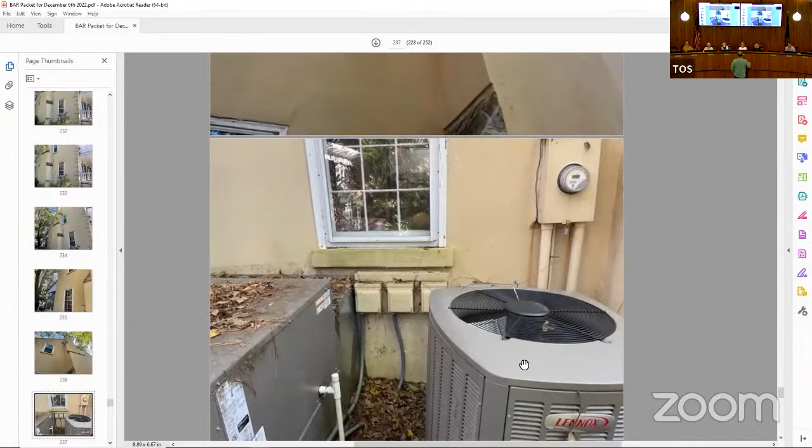Right now those are all foam behind those blocks. On the crawl space part, we're not really sure what's down there—either the concrete block is offset, or the face of the concrete block has like a 2-inch stucco foam. So outside of that, we want to take the parapets down and do Hardie on the house. Also, we would take out all the existing columns, since most of the ones on the porches are rotten, and use square columns like she has on this rear porch in the back. It was built in the 80s, mid-80s.

Yep, so not a very good time for a stucco house—a lot of lawsuits back then, and this one probably should have been included in a lawsuit. Aren't you doing something with the rear dormers as well? Yeah, so if you look at these 3 dormers right here, it did make a lot of sense—those are actually vinyl. It made a lot of sense to go back and put Hardie on all those sides and add the overhang.

So what we'd like to do is combine those into a shed, just one single shed roof off the back, give her a little bit extra space in the back for her closets, and make it a little bit easier for maintenance.

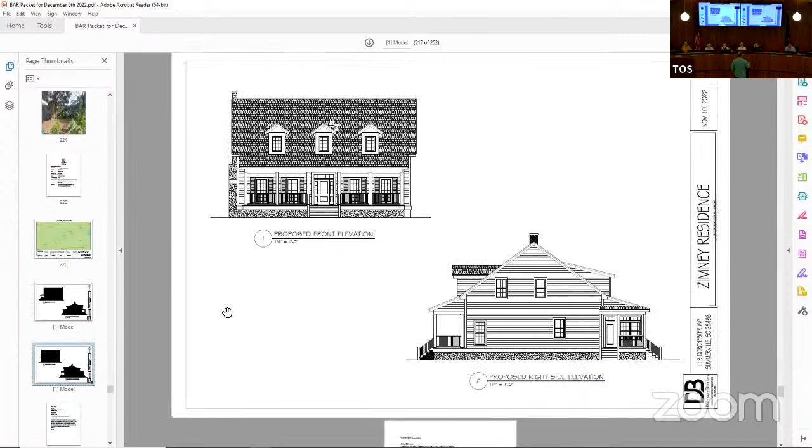Any window replacements here? The upstairs windows have been replaced, but the downstairs windows have not, and they're all wood, true divided light, and they're rotten. So we want to come back and do something with those. We'd like to match the ones on the second floor, but those are vinyl, so we're at your mercy on the windows. The front door would be the same - we would replace it with a like front door in wood. The side lights, the transom, all that would be the same.

Eventually we would want those to be simulated divided light or true divided light windows, regardless of wood or vinyl. We have vinyl on the second floor. I'm asking what would you require - would you require those to be wood, or wood clad, or would you want those to match the upper ones with vinyl?

We would maintain the same grid pattern, which I believe is like 6 over 6. In the past, we've approved vinyl windows as long as they have the simulated divided light. Sure, that's the main thing. No problem - so no snapping grids, and it's simulated inside and outside. 100%, I understand that.

And there will also be a color change, that would be the last caveat if it could. We had a designer that came up with a color palette, and so we would use a smooth Hardie, all Hardie trim, and then the color palette that is chosen. Same thing on the soffits and eaves - all going to be redone in Hardie as well.

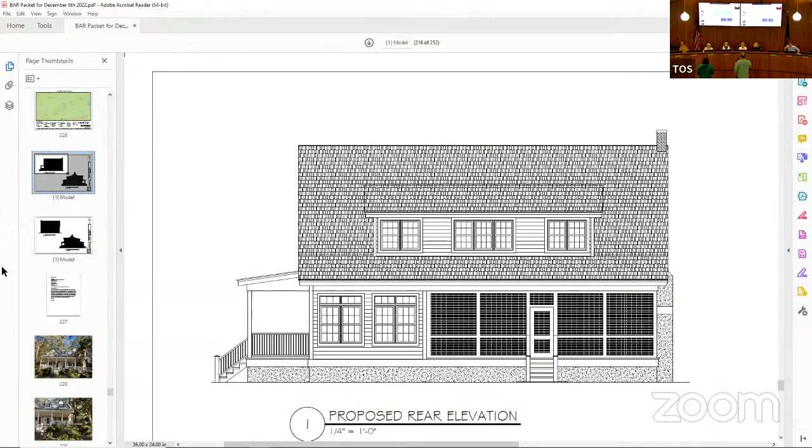Can you blow that one up back up first? Is that stucco on the front of the house as well? Yes, it is. Okay, that's a good catch. So what do you want to do?

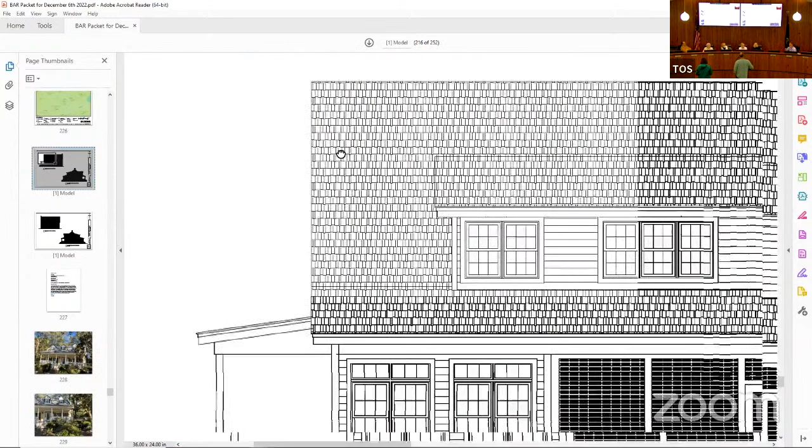Just the way we do it, like you saw those details from that other house, the Southern Living House. So just true 1x6s around the window, but no picture frame. So a sill, a faux sill on the bottom, and then trim around 3 sides. So a traditional detail, not a picture frame detail.

I think we're showing 4-inch trim on that, but do you want 4-inch on the sides and 6-inch on the top, or are you that specific? You could do 4 on the side, 6 on the top, but what we're saying is the sill is a true sill, not a picture frame.

And the cross member on the top, the header, should be sitting on top of the sides rather than being extended out or 45. Not extended out, just a reveal, just not 45.

But 6-inch lap siding, Hardie siding is good. It is, but corner boards and a skirt board like you've shown there.

And the front, the porch will look like that because the porch isn't pushed out, the bottom crawl space part of the porch. But on the sides, you saw that where it pushes out. We're not really sure how that's going.

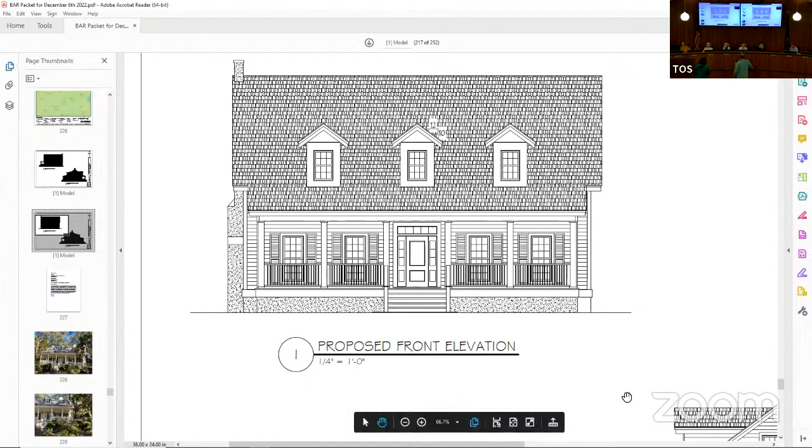And you had said earlier in the presentation, changing the columns on the front to square columns like on the back, but the ones on the back didn't have any architectural treatment at either the top or the bottom, no capital or plinth.

Yeah, that's just a plain 1x2 trim on the top and bottom. Those are 10-inch square columns that are shown. Okay, but they should have a plinth block at the bottom and a capital at the top. So what size do you want for that trim?

I don't know, Rachel, what's appropriate, but they do need to have some detailing. Like 10-inch on the bottom and 6 on the top, something like that? Is that what you're doing? You mean like a base? Yeah.

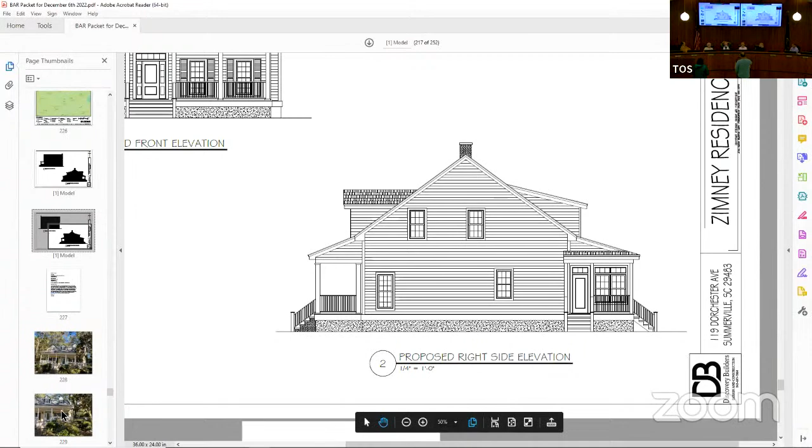I don't usually go as high as 10 inches. Yeah, 10 seems a little heavy. But the ones that are on the front now, which are round, have an appropriate capital and appropriate plinth, so do something similar is what he's saying. It makes it look more finished.

And currently on the chimney, there's stucco and there are some cracks, so we're not sure if the stucco is removed. We may end up just replacing with brick. So there was a picture of this brick, I don't know if you...

I bet you that's block. Wow, yeah, that's what we said. I wasn't sure if you want some painted stucco, or it might even be framed with a metal stack going up through it if it got stuccoed.

Yeah, we got a permit to make a repair. We were gonna do that, but it's just the wrong time of year, ripping off part of the house until we knew what you guys were gonna say.